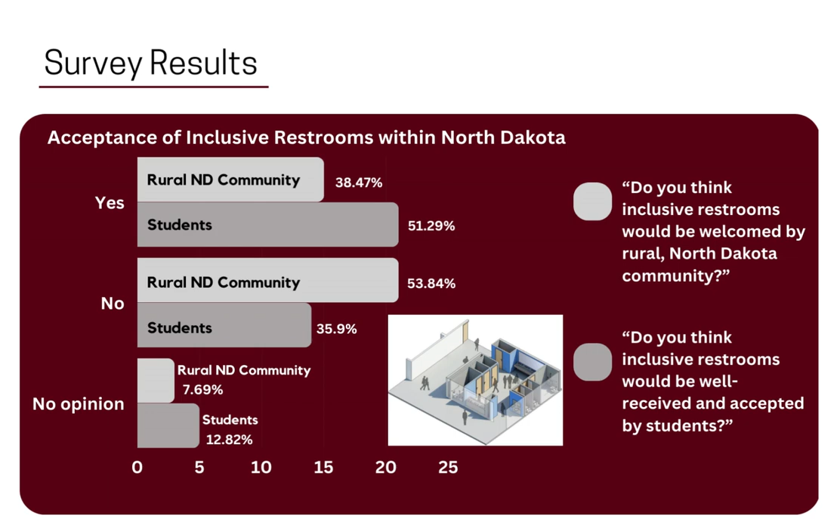While this is not extremely in favor of inclusive restrooms, our team decided to design one in our school for middle and high school students. Sophie will share why we came to this decision later.

Questions about student safety and security were also asked in our survey. When giving respondents the choice between two school entrance pictures, one with metal detectors and one with glass walls and a bright, welcoming environment, the picture portraying the welcoming environment was highly preferred, with 95% of participants saying students would prefer that type of entrance.

In the second part of our survey, questions were focused on staff members. The biggest goal for staff spaces in our project came from our research, including the results of this survey when we asked staff to agree or disagree with the statement, "If I had a place to relax or take a break, I would be a better teacher and coworker." More than 63% of staff agreed that they would like a place to relax or take a break.

Overall, the findings of this survey provided important and useful information about what design elements are desired and preferred within a rural school. We tried our best to apply this research in our school to create a well-rounded, evidence-based project.

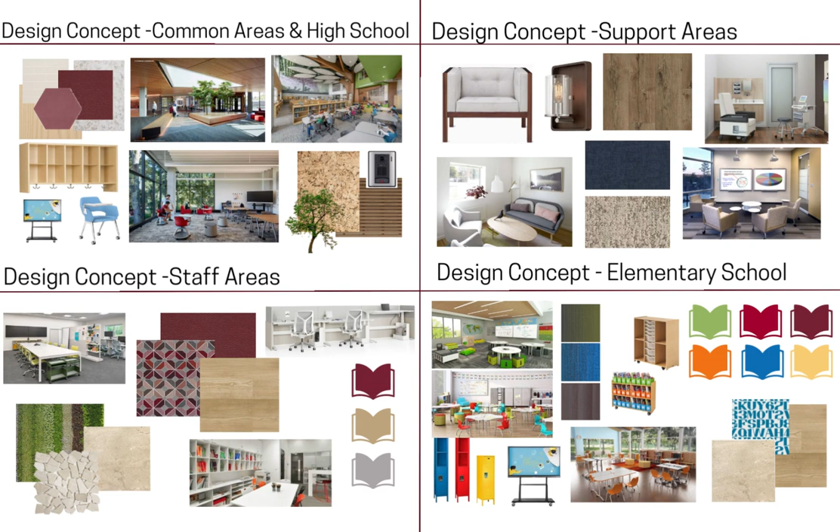These are concept boards for the spaces we created. As you can see, the common areas, staff areas, and high school are focused on natural materials as well as school colors, which are maroon and gray.

The elementary school adds color to the space due to the preferences we discovered during our research. The support areas use blue materials and finishes to separate themselves from the educational portion of the school to create a more comfortable atmosphere.

As you can see here, the whole school is divided into 8 parts. We have designed spaces in areas A, C, D, and E, and we'll share with you more about these spaces in the upcoming slides. Rooms and areas found throughout a typical school, such as classrooms, restrooms, cafeterias, kitchens, and many other spaces, have space allocated on construction documents in areas A, C, D, and E.

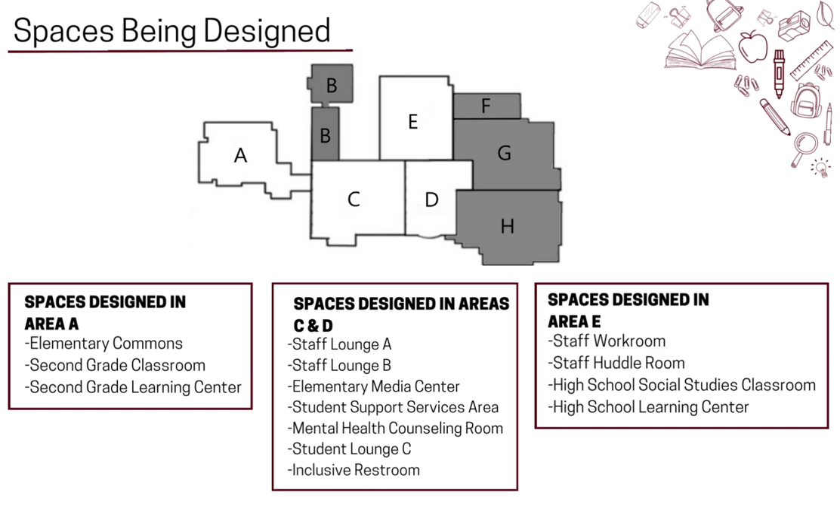Areas B, F, G, and H would also contain many traditional school rooms and areas. However, those were not in our scope of work and were not used to allocate space for, and therefore have been grayed out.

Area A is located on the west side of the building and includes the elementary wing of the school. We were not able to design each space in Area A, so we focused on the elementary commons, second grade classroom, and second grade learning center.

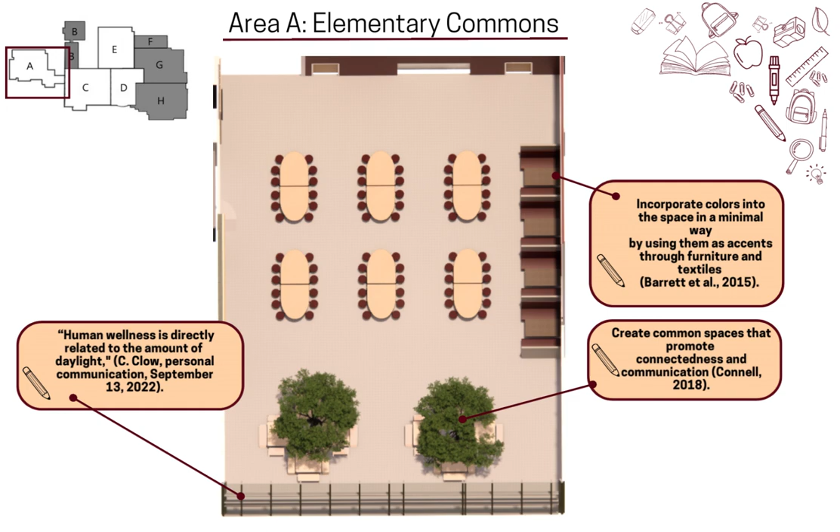Here is the floor plan for the elementary commons area located in Area A. The space will serve as a multi-use space, which includes a gathering area, open floor space, but its main purpose will serve as the elementary students' cafeteria. The collapsible cafeteria tables will allow for the ability to serve 72 students, and the booths on the east side add an additional 16 seats.

It is important to ensure the elementary commons area is a safe entrance to the school for students and staff. Throughout our research, we decided that less is more when it comes to security in the rural area. Moen and Frang (2018) state, 'Unfortunately, the unintended consequence of enhancing security measures is that it might create the impression that a need for more security exists, indicating that the school is unsafe, when in fact it may not be.' Our design focuses on creating a culture of community, transparency, and safety.

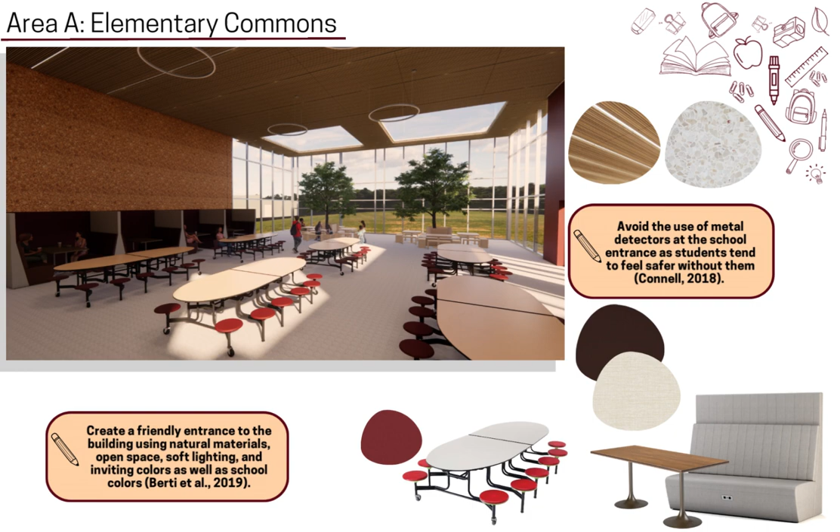The elementary commons is full of light and natural elements which help make it the perfect gathering space for students, staff, and parents.

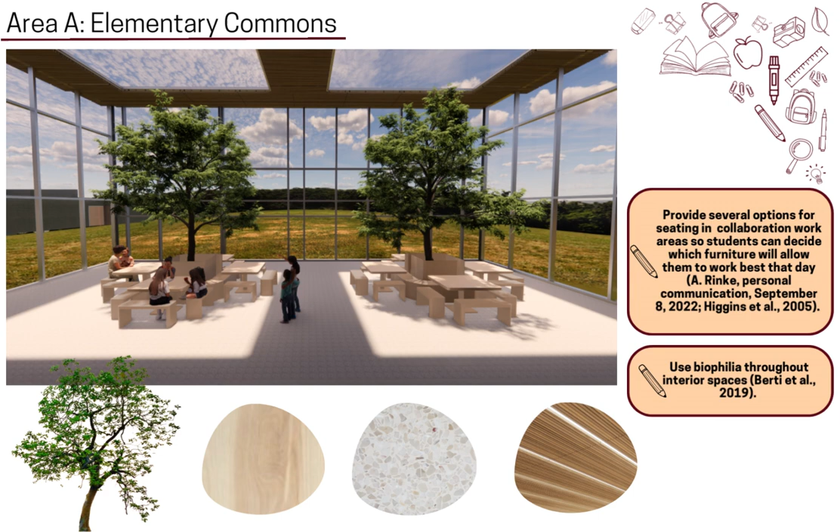This rendered perspective shows a custom seating area with a tree planter in the center. We wanted to add something to the school that would support the community and be a unique feature within the school. By using locally sourced materials and adding 2 custom seating areas to the space with large skylight windows located directly above the trees, we were able to achieve the most natural light into the space.

The design of a classroom is so important for students to be able to learn successfully no matter their learning style. Classrooms today are filled with students of different backgrounds, learning styles, and abilities, but must be designed so that all students can learn. There are a few aspects of design that we focused on for the classroom.

The first is color. Color plays a role in how the interior environment affects students. We learned that elementary level students prefer a variety of colors in their spaces, as it creates a fun environment that they want to be in.

However, colors can also be overstimulating for some students, creating unnecessary anxiety or distraction. The use of gray walls and ceiling materials, natural wood finishes, and the use of color in the carpet and upholstery allows for this balance.

Another aspect is the furniture found in classrooms. The traditional classroom with linear rows does not work to provide quality education to every student trying to learn. Linear rows do not provide for easy collaboration amongst students, and uncomfortable chairs can cause students to become unfocused.

Barrett et al. (2015) says, 'Flexibility is needed to allow for different activities within the classroom and/or the needs of the different users.' This use of flexible furniture provides students with the ability to choose what they sit on, where they sit, and what comfort level they need, and it allows them to change the next day if it isn't working for them.

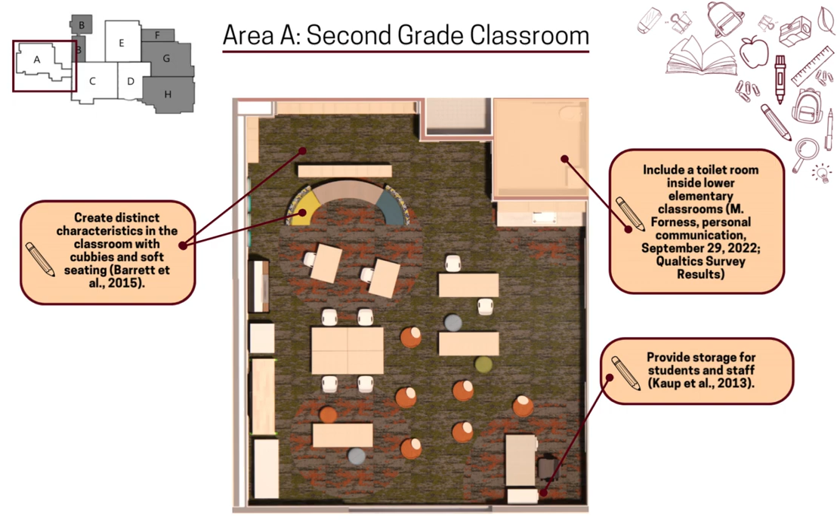Here you can see an example of flexible furniture at work. Flexibility allows for different furniture arrangements that can have positive effects on learning outcomes. Each and every student is different, and therefore each and every class may be different.

Having furniture on wheels or that can easily be moved allows teachers to rearrange their classroom to fit the needs of their students. Having a variety of seating options, such as chairs and soft seating with stools and ottomans, helps students learn best at their comfort level. We also included sit-to-stand desks with modesty panels to help improve the well-being of the teacher while also providing privacy.

Since the goal of the classroom was to avoid linear rows with students all facing the front, some students' backs may be facing away from teachers at times. To help combat this issue, a monitor was placed on the back wall that displays the same information as the smartboard at the front of the room, so students can see what is being taught without constantly needing to turn around.

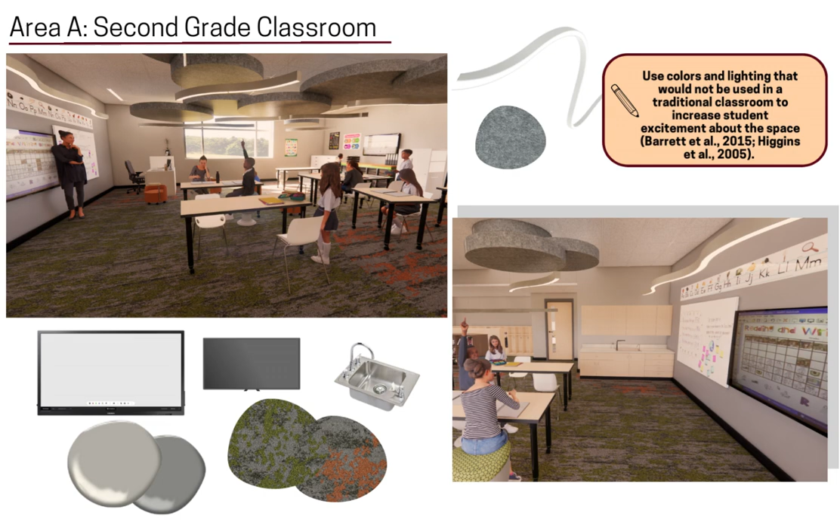This slide also highlights the built-in cabinetry and sink area. Elementary classrooms still rely on lots of materials, so storage is very important. We also learned from teachers on our site visits to different schools that they want sinks in their elementary classrooms, so we made sure to include one.

One final thing we would like to highlight about our second grade classroom is the use of storage. Cubbies for students to keep their backpacks, coats, and other personal items are stored here in the classroom instead of in lockers out in the hallways. Having storage within the classroom eliminates the need to leave the classroom to retrieve these items that they need to grab.

The remaining storage that is not built in fits the flexible furniture mold by being on casters for easy reconfigurations. Another aspect of storage is that we intend for students' materials and writing utensils to be stored here to eliminate keeping items on their desk and allow desks to be as flexible as possible so students can change where they need to sit. This also promotes wellness as it allows students to get up and move throughout the day to retrieve items they need.

Although classrooms are where students spend most of their time learning during school, we have learned and concluded that education is not limited to the four walls of a classroom, and if designed properly, education can be everywhere. This is why we decided to follow after the Central Cass K-12 school and include multiple learning centers within our school just across the hall from classrooms.

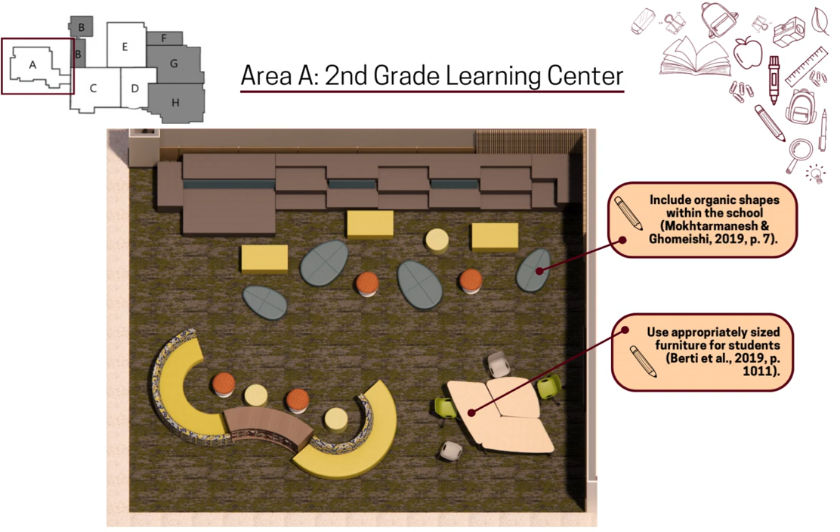Pictured here is our second grade learning center. It includes a variety of furniture pieces such as soft stadium seating, curved modular furniture, ottomans, and movable tables and chairs. In the elementary commons, we decided to include a live tree, and we wanted to carry this theme throughout our elementary spaces.

In the learning center, this is communicated through the use of materials, finishes, and furniture. The wood wall paneling resembles tree roots and the tree trunk, which spans to the ceiling, where several green acoustical ceiling clouds and light fixtures shaped like leaves hang over the students, bringing in biophilic elements.

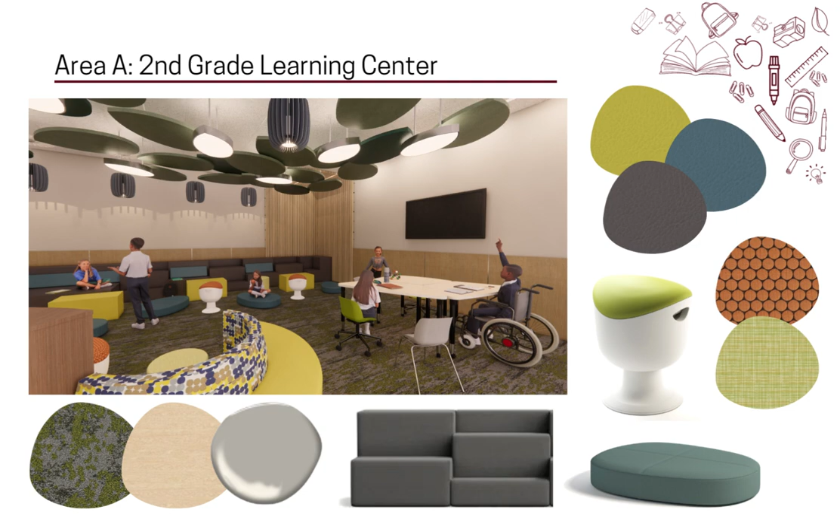The carpet in the space is green to resemble grass, and the organic-shaped ottomans act as fallen leaves for the students to grab a seat on. All of this symbolizes the young students growing as they learn and interact with their peers at school.

This shows another angle of the same learning center. The ceilings in the space are high and it's wide open to the hallways, so the wood wall paneling and acoustical ceiling clouds, as well as soft furniture and carpet, not only help communicate a message, but also play a role in limiting sound transmission.

Like the classroom, this space provides flexibility, as the curved seating, bookshelf, tables, and two swivel-based chairs all have wheels for easy rearranging.

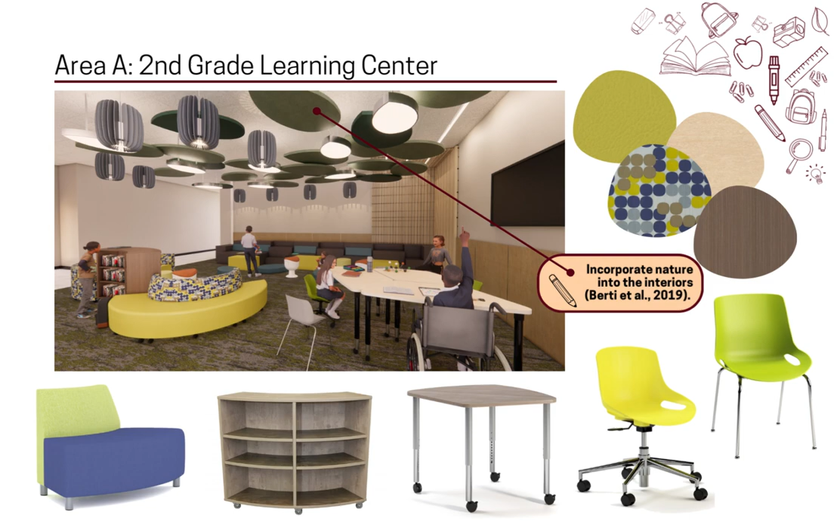We acknowledge that a key component to student success is all the work the faculty and staff do for students. In order for faculty and staff to be their best selves, they need a place to be able to escape in order to recharge if needed.

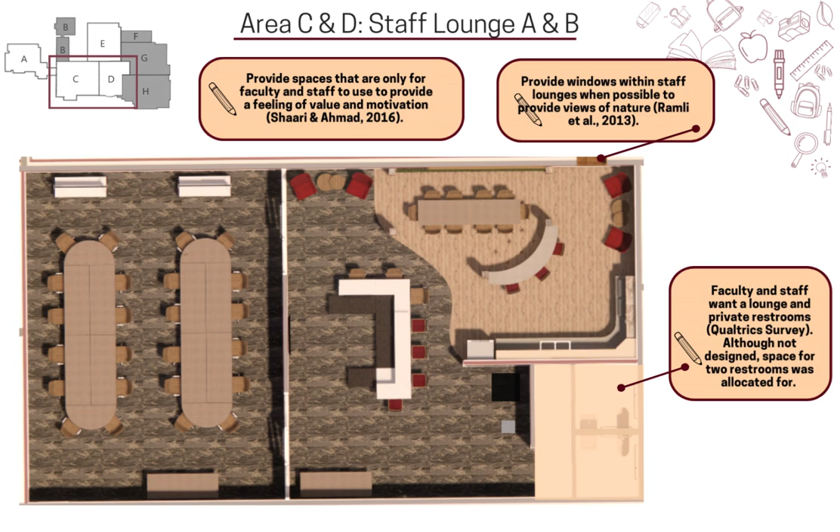We also learned that staff look for a place where they can all fit to meet when needed. Here you can see the side of the lounge where staff can have meetings. This space also contains flexible furniture, such as tables and chairs on casters, that allows the room to be changed in order to fit the needs of the users.

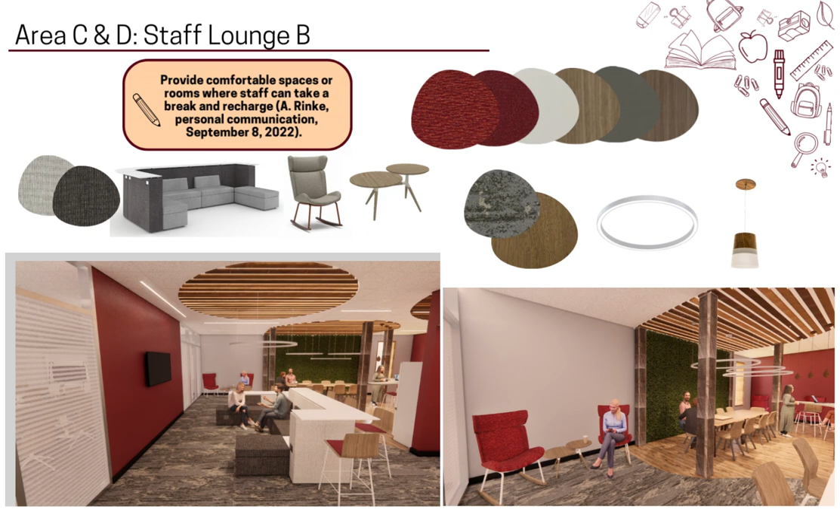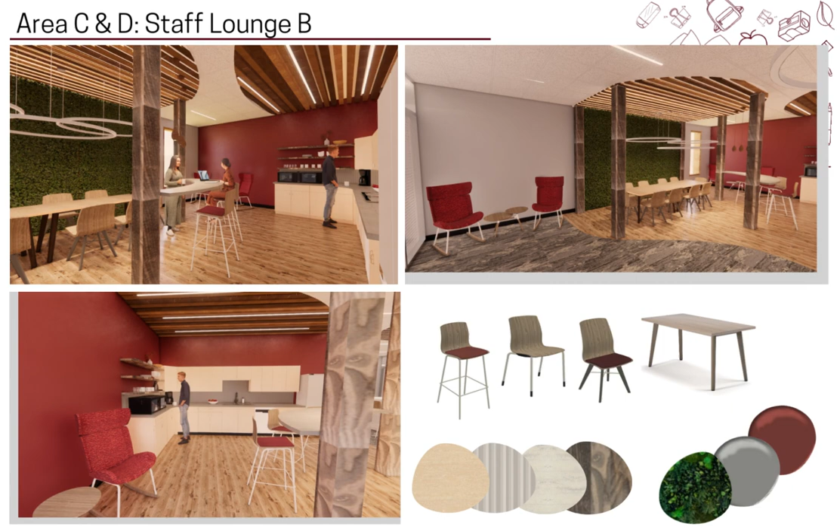On the other side of the lounge is where faculty and staff can go to recharge during their breaks, eat lunch, convene with other staff members, or even just have a comfortable place to work on stuff outside of their rooms or offices. A variety of seating is offered to provide comfort to all faculty and staff. School colors are seen in the staff lounge to promote school pride, with a mix of natural materials to promote wellness.

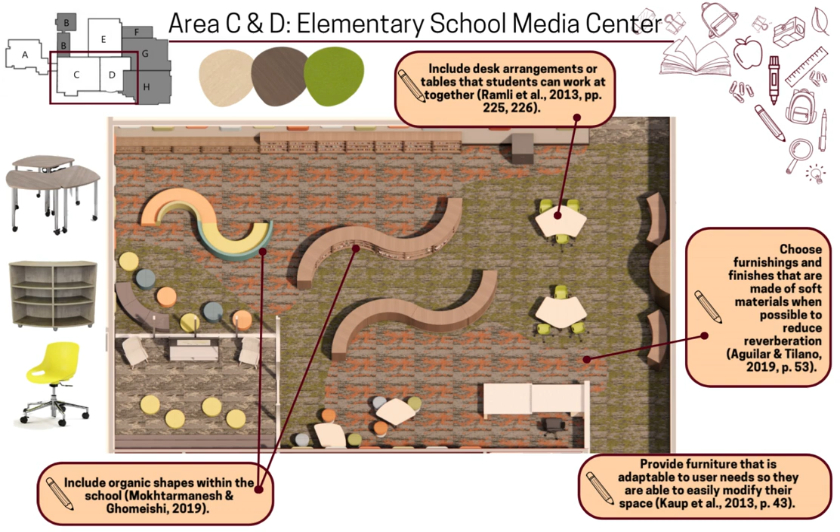The elementary school media center is the perfect place for group or individual work. With its many seating options and flexible assets, students have the resources they need to succeed in school. The low curved bookshelves and high ceilings help to create an open and inviting atmosphere for students to work on their class, read, or more.

One final thing to highlight is the custom tree book shelving and lighting feature. This serves multiple purposes of acoustics, lighting, and creating a fun environment students want to be in.

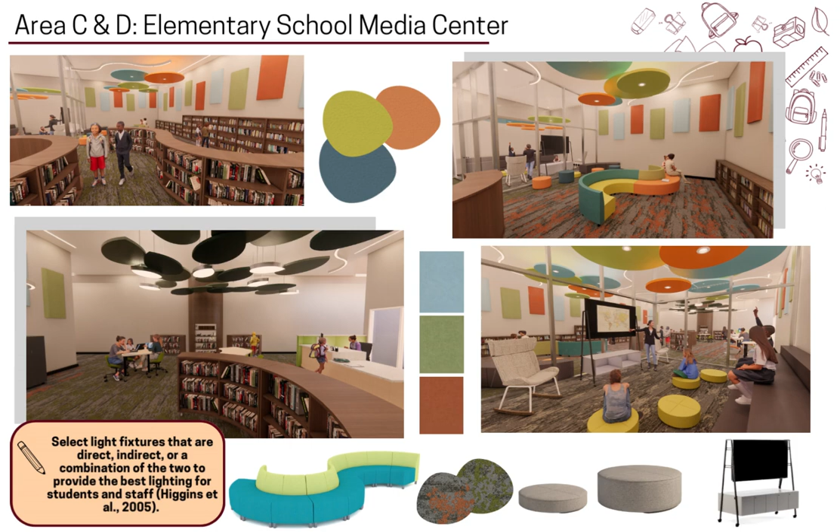One of the biggest issues we discovered in all of our research for rural schools was that they are way too often left at a disadvantage because of their geographical location. We wanted to be a part of solving this problem for students as we don't want this to be a barrier between them getting the help that they need.

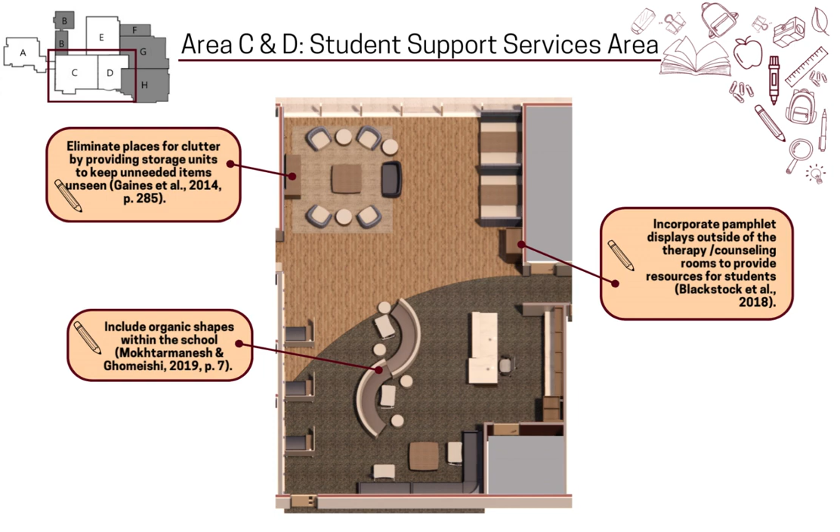For this reasoning, the Student Support Services area was created. We allocated space for 2 mental health counseling rooms, but we didn't want to stop at that. There is also a room where medical appointments can take place with a permanent medical professional. Pictured is the central hub for all resources provided in the area.

This space is meant to reduce the stigma of mental health and ultimately try to get students in need to seek the services the school offers. Since students are already in school all day long, we found in our research that it only makes the most sense for schools to offer these resources.

When students enter this room, they can start by checking in here with the receptionist for their appointment. However, students don't necessarily need to have an appointment to use this area. They can also just come in here to do homework or hang out if they need a break from the rest of the school environment.

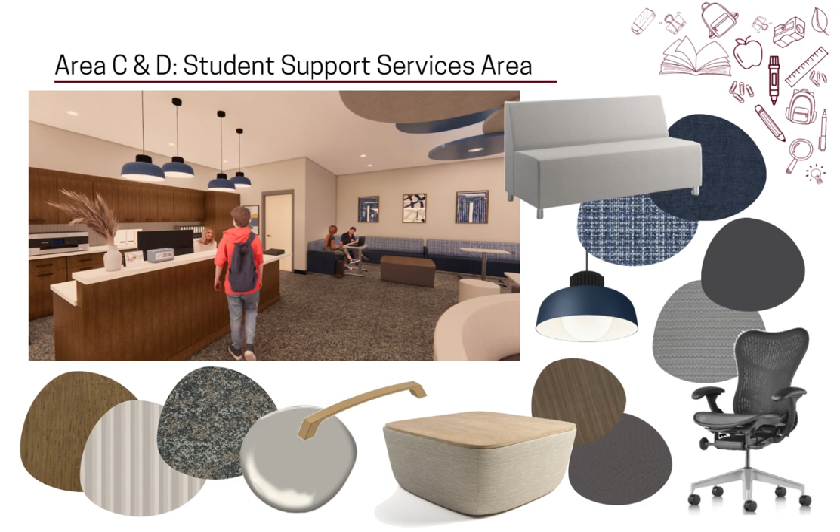There are several different types of seating areas for students to choose from depending on how each student is feeling that day and what they are needing from the space.

As you may have noticed, the colors and finishes in this area are completely different from the rest of the school, and that was exactly the intent. When coming up with the design concept for this space, we thought about what interior environment we would prefer if we were in need of mental health counseling.

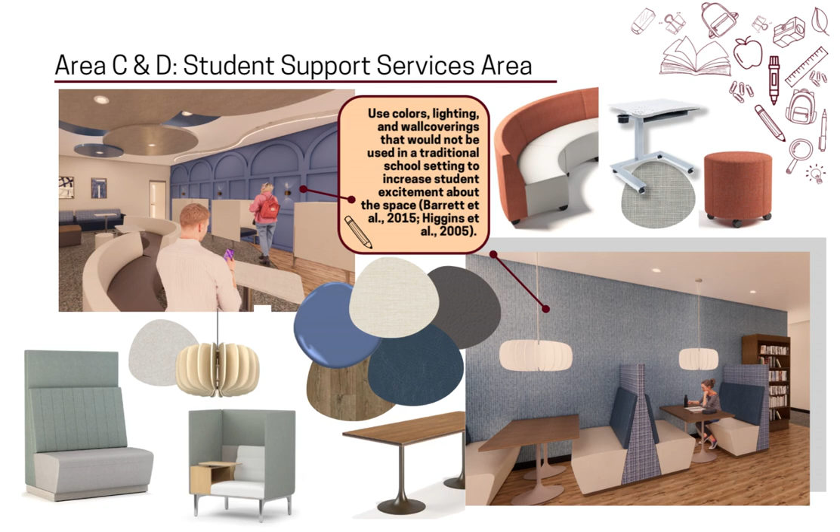Rather than creating a sterile, hospital-like environment, we would like to feel at home. That led the space to have a more residential style. We think this plays an important role in making students feel comfortable receiving help when they may be nervous about their appointment.

Warmer wood tones were used, as well as several shades of blue, which evoke feelings of trust, stability, and calmness, perfect for this area. The curved shapes in the furniture and arched wall paneling also create a softer approach as opposed to squares with sharp and rigid corners.

We hope students can walk into this space and feel a sense of calmness and relaxation before meeting with a medical professional.

With an increasing awareness of mental health, the Support Center also includes an individual mental health counseling room that allows students to meet one on one with a professional counselor without having to leave the school. This small space allows for students to have a comfortable place within the school to talk about anything that they may be facing.

The finishes here connect to the support services area and include welcoming blue colors as well as dimmable lighting to allow the users to personalize the space, making it the most comfortable for them.

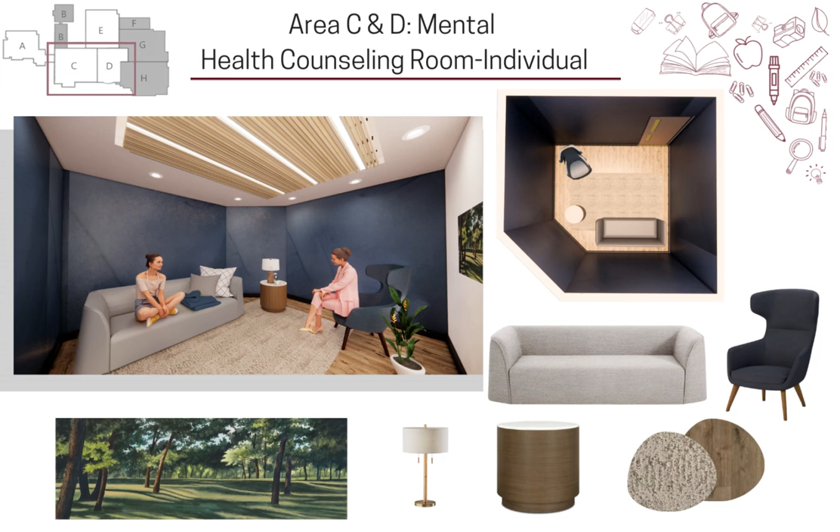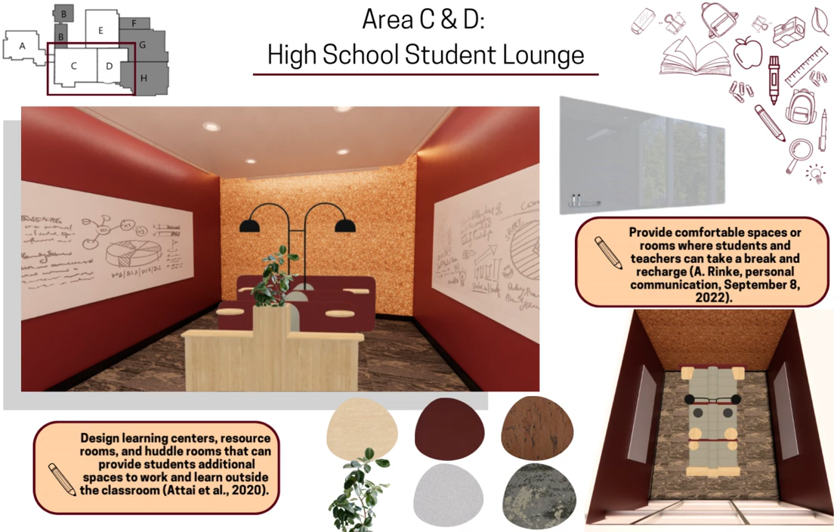This space offers a variety of lighting options, as you can see. There are different levels of light, which include perimeter lighting, recessed lighting, and task lighting within the space.

Although there are different opinions about inclusive restrooms, which we have learned from our survey, we as future interior designers feel it is our job to push limits and introduce new design concepts that are beneficial to the users. An inclusive restroom is provided in the middle and high school area off of their lunchroom and commons area.

Stalls are completely enclosed and include acoustic properties in the wall construction. An ADA stall is also provided.

The design of the inclusive restroom is a balance of openness and privacy, with half walls in the entrance but a full wall blocking the views of the stalls. This design also allows staff to more easily stop conflict that can be seen or heard out in the open as opposed to a typical restroom design.

For some students, using gender specific restrooms can cause anxiety. Students have enough to worry about and don't need an additional stress of using the restroom. Providing an inclusive restroom provides these students a safe space.

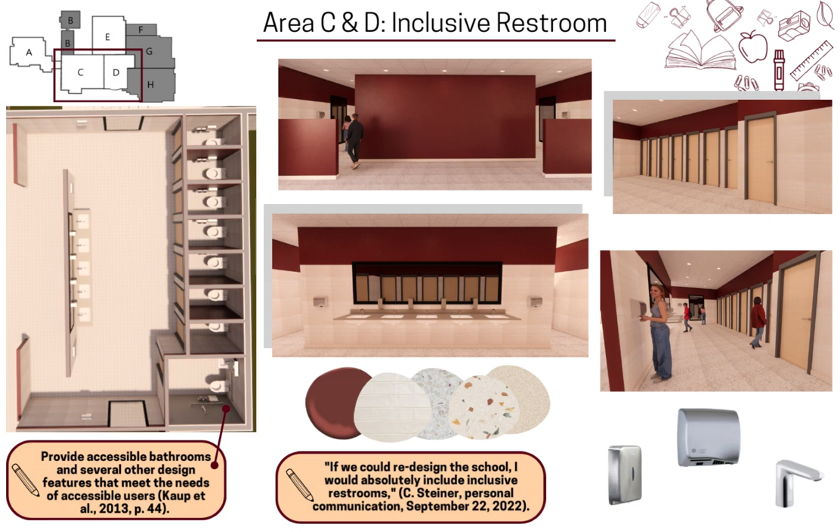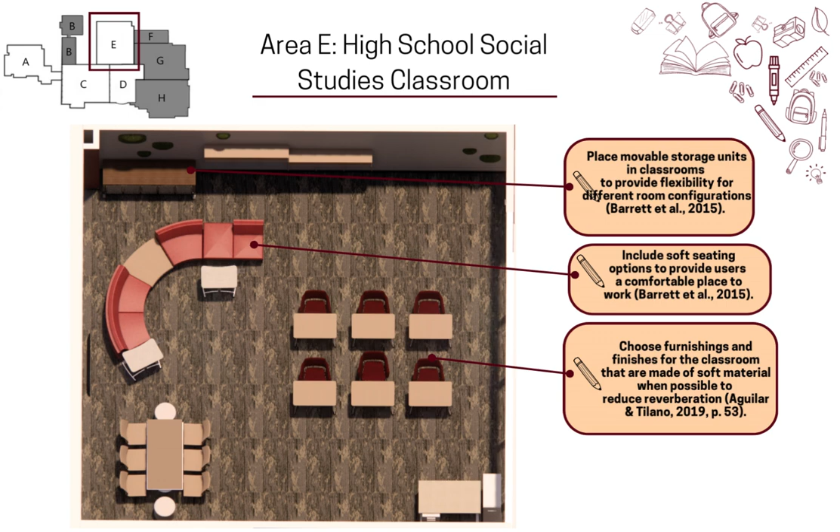After doing research this year, we discovered that lockers for each student aren't necessary since students bring their backpacks to class. This is why you see backpack and coat storage in each classroom.

The materials and finishes used in the high school classroom are school colors as well as natural maple wood tone that coordinates with the ceiling and wall system. This offers acoustical benefits to the classroom space.

The large table is perfect for group collaboration, and the personal desks offer each student their individual space with the opportunity to move the desks at ease since they are on wheels. The soft seating at the back of the class is perfect for a more relaxed task such as reading, but includes laptop tables for a variety of activities.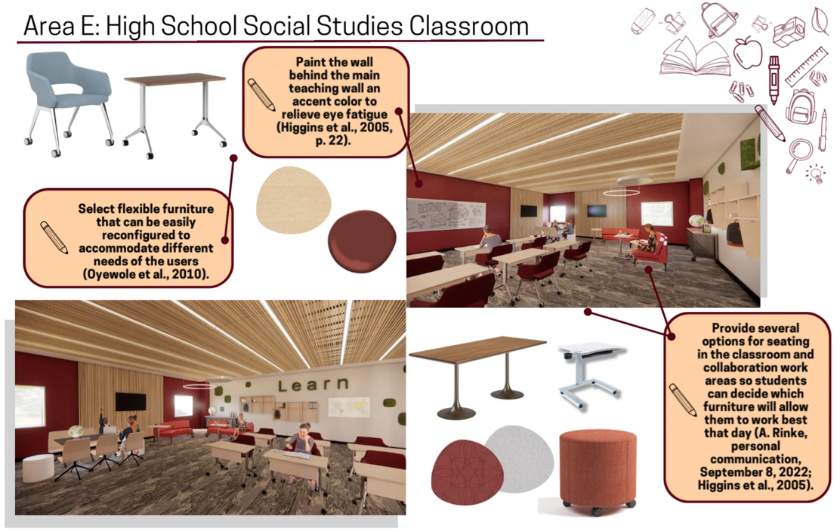Just down the hallway from the high school classroom is the High School Learning Center. This space has the same purpose as the second grade learning center discussed earlier in that it acts as another area for students to learn and interact outside of the classroom.

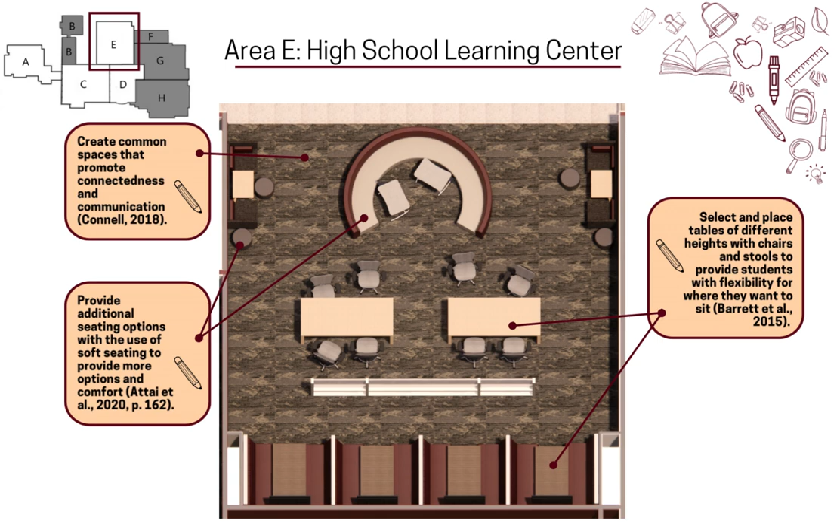The Superintendent of Central Cass School shared that these comfortable spaces outside of the classroom encourage students to stay at school when they are not in class.

We chose colors that show school pride in this learning center since it is for high school students, but we also used finishes such as the cream and gray wall covering, organic pattern carpet, and ring light fixtures that aren't standard in a generic school environment.

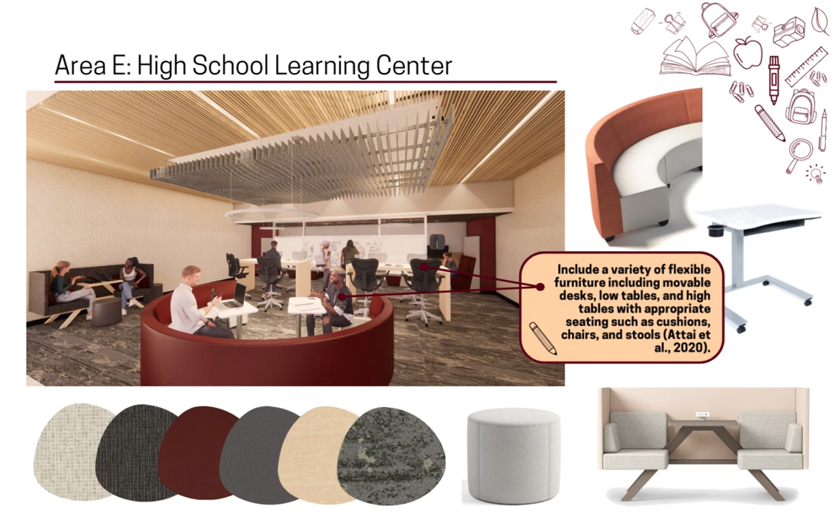The ceiling has two different sound-absorbing finishes that also provide visual interest.

High school students often work on homework and projects together, so we wanted to make sure we provided space for collaboration in the Learning Center. Pictured here are two bar height tables with stools that seat four students each, but all of the furniture in this area can be utilized for group or partner work.

The partition wall behind these two tables includes a whiteboard surface that students on either side can use. It also blocks a view of the back wall to create more privacy for students who are trying to focus.

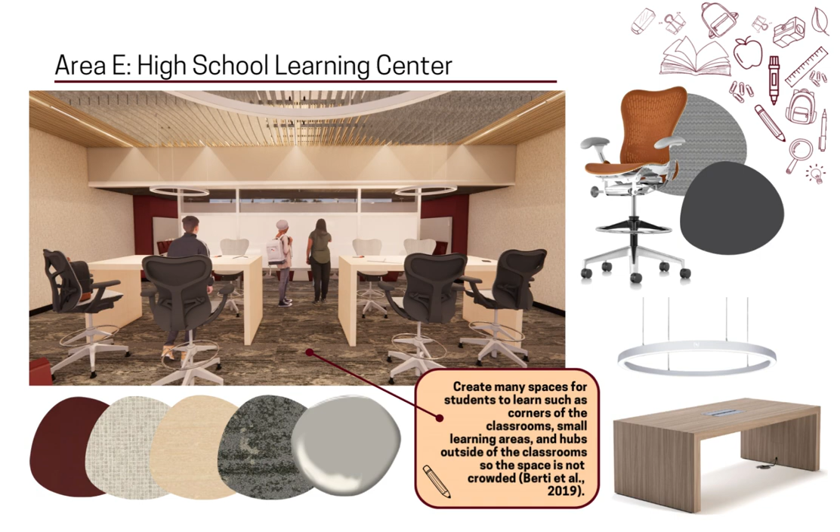On the other side of that partition is a row of booths along the back wall. The ceiling was lowered in this section, and acoustical ceiling tiles were applied to provide more noise control. The pendants hanging down over the tables also have acoustic properties to limit noise.

A monitor with Bluetooth capabilities was provided in each booth so students can easily share materials on the screen, whether that be for working alone or with a group.

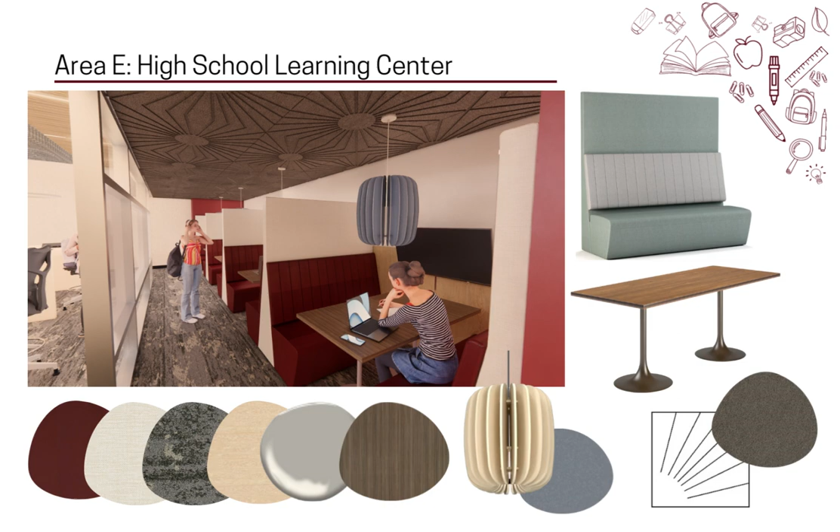While on a tour of Central Cass K-12 school, a teacher expressed to us that they wish they had more resource rooms to be able to work with students in.

This led us to develop staff huddle rooms that can be used as another place for a small group of teachers to meet together, for staff and students to work together, or a place where a single staff member can retreat to if they need to get work done in a quiet environment.

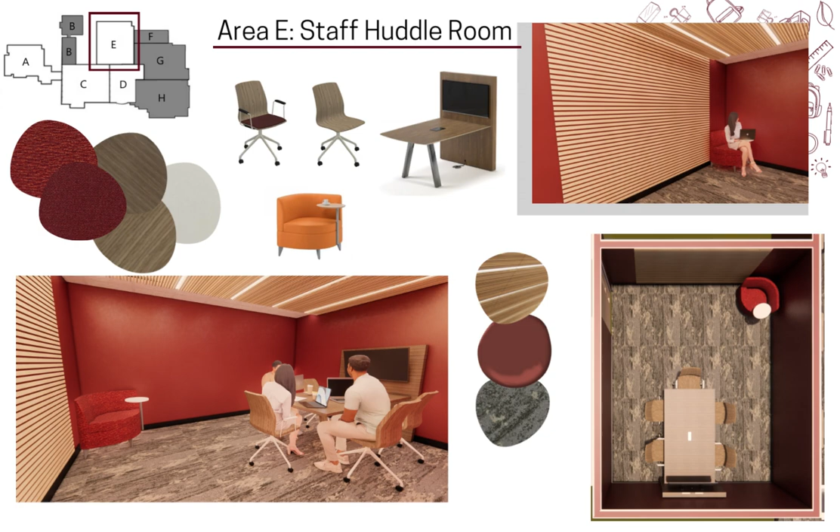This room also includes school colors and natural materials.

The final room we designed for the faculty and staff is the staff workroom. In the middle and high school levels, some staff may share classrooms and need a place to work if another teacher is teaching in their room.

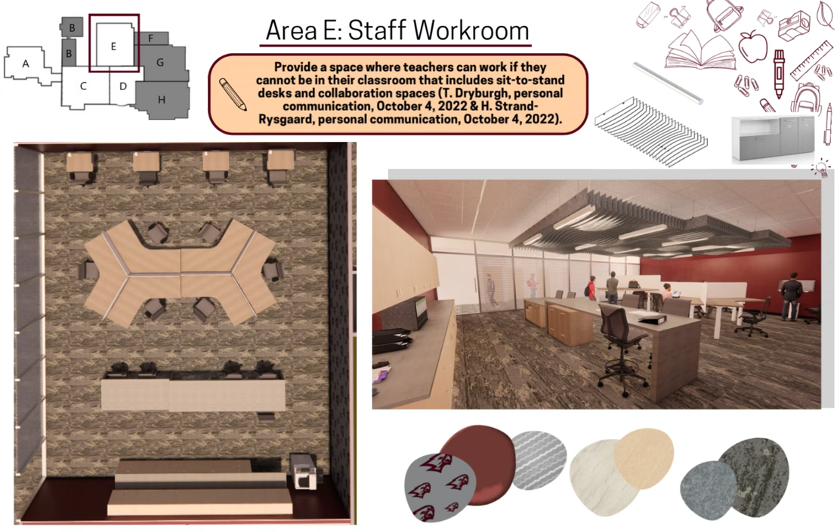This is also a place where students can get help from teachers on assignments. The glass partition allows students to walk by and see what teachers are working on and are available to assist on assignments. The pattern on the glass allows for privacy while also allowing students to see in.

The staff workroom offers sit-to-stand desks for staff to use, as well as areas for collaboration. A mix of chairs with and without arms allows all individuals to sit comfortably. This is also an area for printing or copying materials.

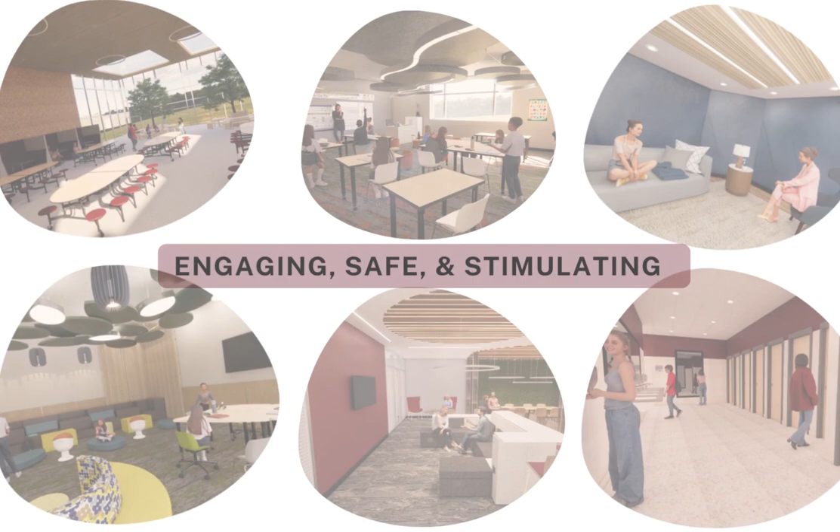In review, we wanted to create a school that allows all occupants to be safe, healthy, and successful. Through our non-traditional approach and thinking about the well-being of students, faculty, and staff, we feel that our design helps fulfill the current Mapleton Elementary School's mission of every student having an equal opportunity to reach their maximum potential in an engaging, safe, and stimulating environment.